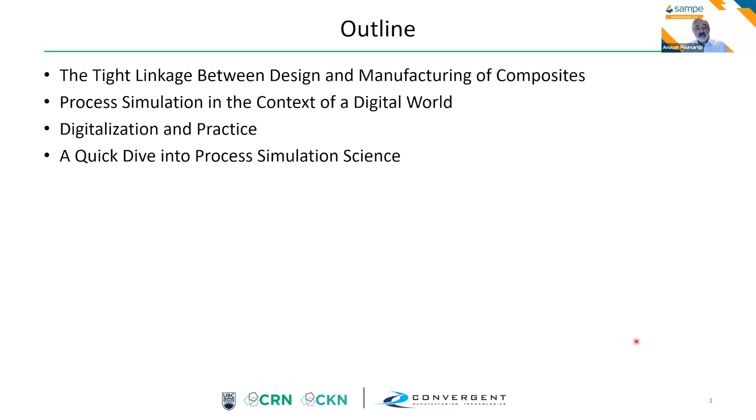So the way I'd like to go is start off by really emphasizing the tight linkage between design and manufacturing of composites, position process simulation in the context of a digital world, talk about digitalization and practice, that is, after all, why we are doing all of this. Do a quick dive into process simulation science, talk about how that science is harnessed with technology, give an example of how we're continuing to push the bounds of what we can do, talk about practicing this capability with examples in materials and process design and in production, and then finally a quick summary and conclusions.

So let's remind ourselves as to what is both the strength and perhaps the weakness of composites. Typically, when you design, you have a function in mind, and very simply you ask yourself: what's the best material in the best shape that allows us to achieve that? And then you have to ask yourself, well, can I actually turn that material into that shape? That is where process comes in.

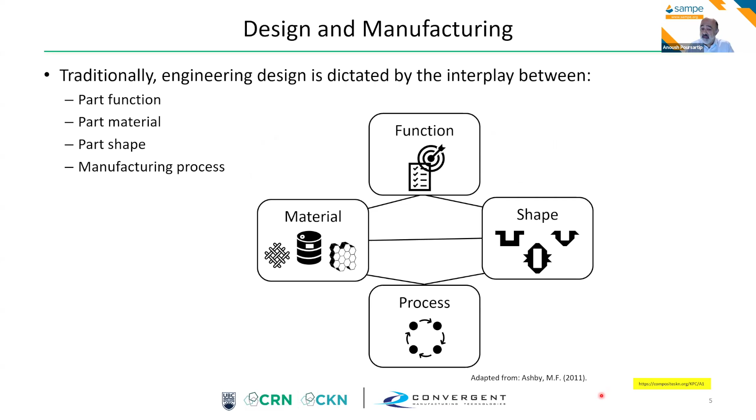The top triangle is very design-centric, the bottom triangle manufacturing-centric. And in the case of composites, of course, the process during the manufacturing steps converts the thermoset from a liquid to a solid; the thermoplastic, you melt it and resolidify it, crystalline or semi-crystalline. That gives you a microstructure, and you end up with the properties that you wish for your design.

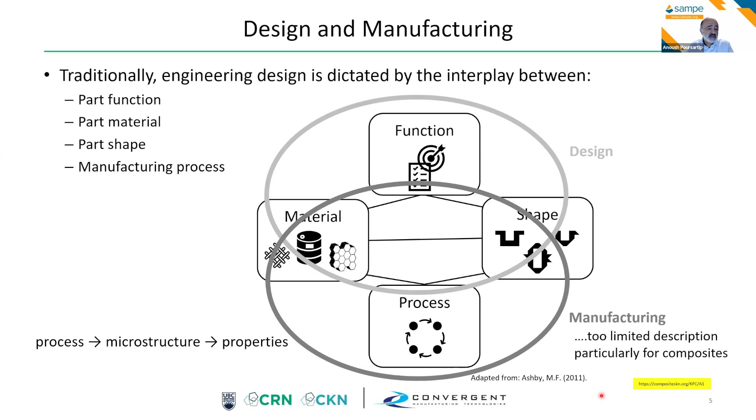Key point to make, of course, is that that definition of process there is a little too limited. As this talk is about processing and manufacturing, let's home in on that for a moment. Let's push function out of the way just a little bit, and actually think about what the impact of this integrated processing of material and shape means.

If you look at certification requirements, they will talk about materials and processes must be defined and stable. You must demonstrate repeatable parts. What does that mean? Whatever you assumed in design, a volume fraction, a degree of cure, a ply thickness, you have to maintain those as you go from development into production. So function, from a manufacturing perspective, is actually replaced by the concept of quality.

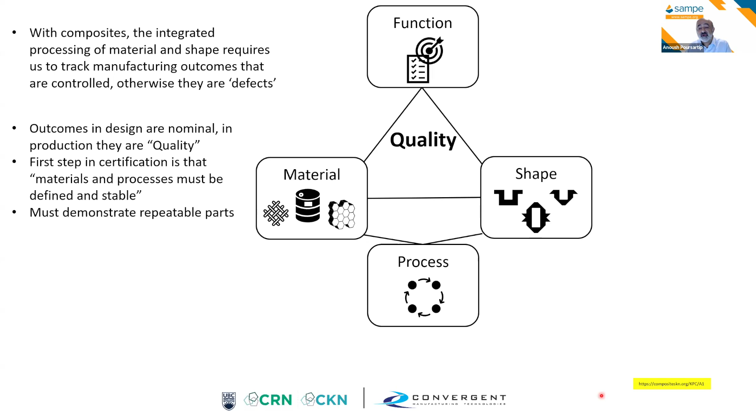So then what we can ask ourselves is, fair enough, what about defining the production a little bit more? This is where we need to bring in the fact that you generate the material into that shape on tooling using equipment. And so now you get this more complete definition of manufacturing.

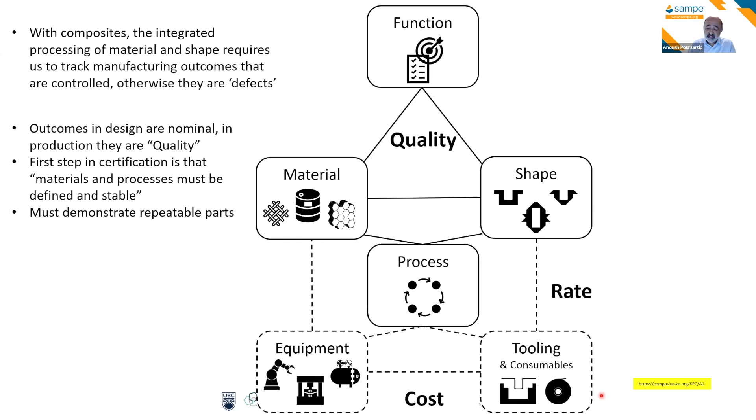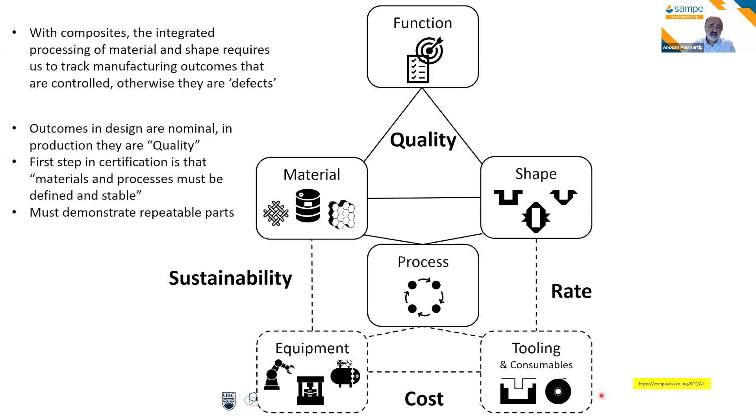Then what we can do is say, well, what are the issues with quality? The answer is, I'd like to maintain quality at a certain rate, at a certain cost, and increasingly with considerations of sustainability. So quality is the one thing we're trying to control in manufacturing, in processing. And it turns out that actually defining what quality is, is difficult.

So we have these outcomes. If they're within spec, 2% porosity, that outcome is not a defect. If it's 3%, it's a defect. So what we can do is we can think about these generic outcomes and when they violate some specification.

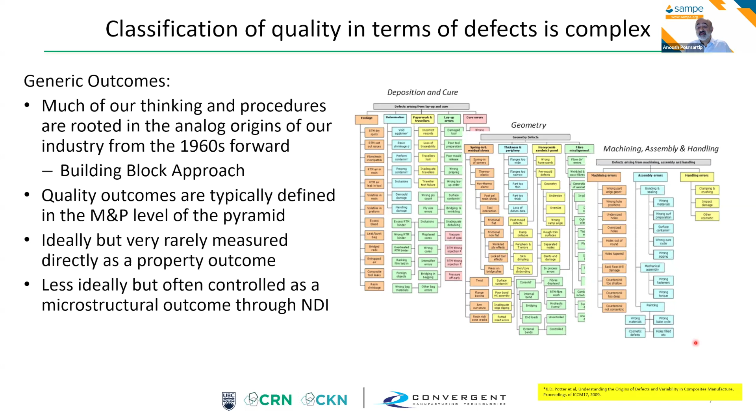Really, what we care about is the property outcome, but it's very difficult to do that. So very often, we control it as a microstructural outcome through NDI. We look at porosity, we look hopefully at thickness, whatever we can measure easily. Very often we're actually forced to use a proxy such as the process history. So managing the temperature history is the way we go. We've cured enough, but we haven't degraded either because it didn't get too hot.

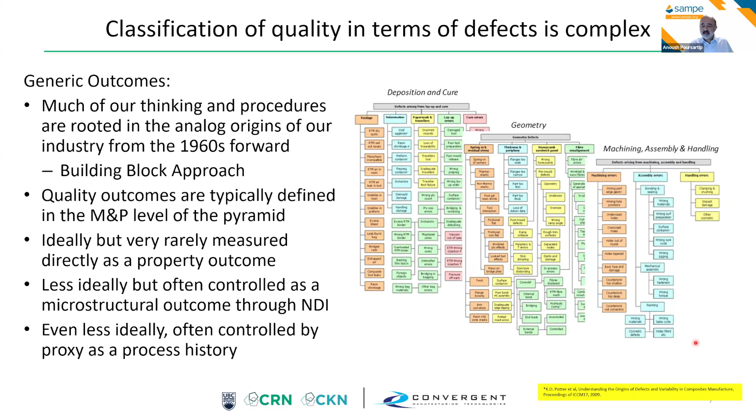So process simulation is very much one way that we're trying to manage all this complexity. So let's position process simulation in the context of all the digital keywords that we hear around us nowadays.

I don't know how familiar you are with the Gartner hype cycle, but I really quite like it. In the Gartner hype cycle, what they do is they plot expectations versus time, and they talk about how all technologies go through this cycle.

If we look at AI simulation for manufacturers, which is a buzzword that is floating out there, they would say that right now is what they call the innovation trigger phase, where what you're seeing is increasing excitement, increasing expectation for that technology. There's generative AI in design and engineering, industrial data management, digital product passports. Then they say there comes a point where you hit a peak of inflated expectations.

They're saying that in 2024, digital engineering's up there. And then everybody becomes disillusioned because the value wasn't there. So you then come rushing down the other side of the mountain into the trough of disillusionment. And they say that's where digital twins are right now, model-based systems engineering, digital twins for products.

And then if you think about where you go next, I apologize, something went wrong there. Then you enter the slope of enlightenment and the plateau of productivity. Back over here, we have funding agency and academic excitement. Over here, you have sustainable industrial and societal value.

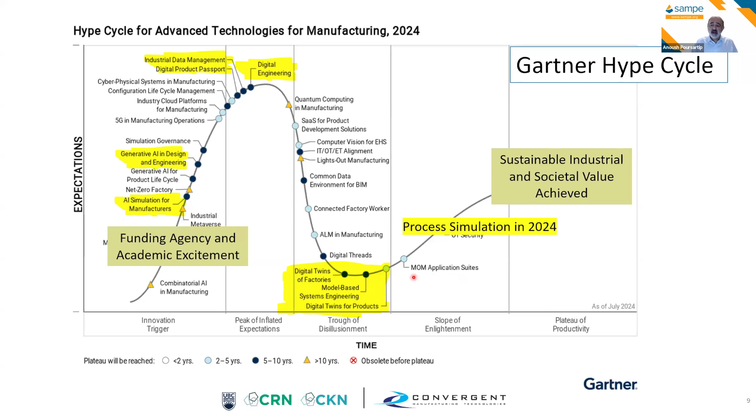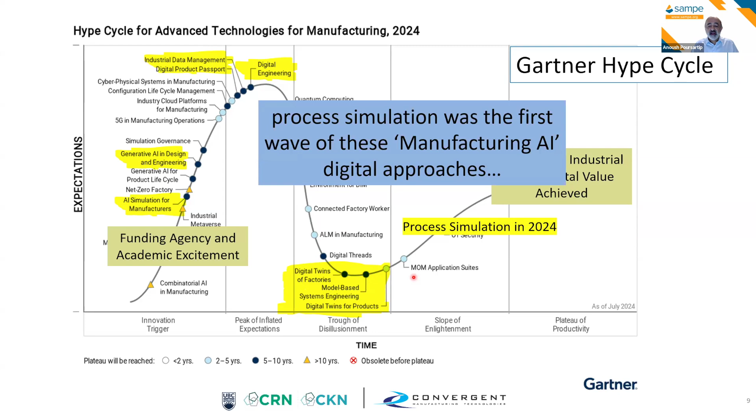So we've gone through these cycles, and I'm going to give you examples of that as I walk my way through this talk. The key point is that process simulation was the first wave of all these manufacturing AI digital approaches. I'm going to argue, and hope to convince you, that it actually forms the framework, the digital nerve center, for all these technologies that are coming along.

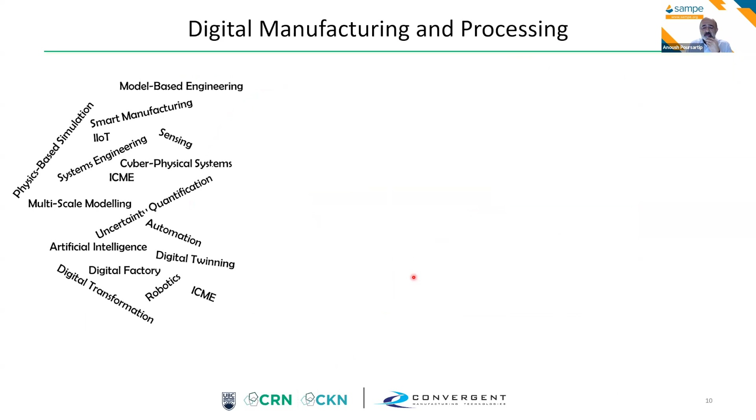So let's think about that a little bit more. There's all the buzzwords on the left, and we're trying to bring some structure to this. One of the more structured approaches that appeared out of Germany some 10 years ago was this idea of Industry 4.0, which says how we've moved from basically water and steam power to this world of dancing robots of today. This is a very manufacturing, factory equipment-centric view of the world.

Parallel to that, coming out of the United States primarily, has been this concept of integrated computational materials engineering, which has a science-based approach to it. It's more design, materials, processing centric. I firmly believe these really come together. They start bringing together all that digital alphabet soup that we just saw.

If you distill it down, what we basically have is tools to help us make better decisions in design, in production. We have prior data, prior experience, scientific process simulation as a structured way of looking at that. We have new data, and data science techniques including ML, AI, uncertainty quantification and propagation. And as we go into the factory, we have sensing, we have automation.

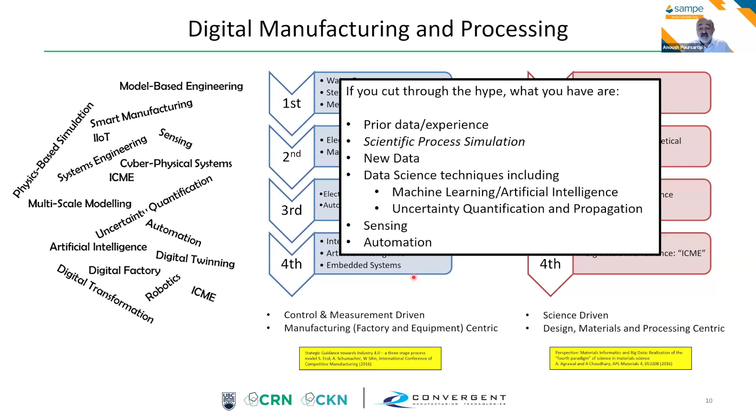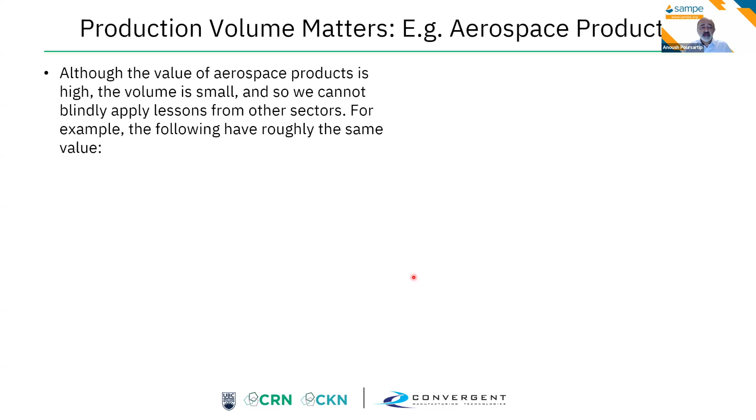Key point as we look at all these digital tools available to us: production volume matters. The value of aerospace products, and I'm choosing that as a market but we could look at any other market, the value is high but the volume is small. So we've got to be careful about blindly applying lessons from other sectors.

These three markets have roughly the same value: 140 million iPhones a year, 8 million Toyota vehicles, about 1,000 Boeing or Airbus aircraft a year. So if you are a machine learning AI expert, you would say, give me 1 million data points, I'll give you a brilliant ML model. Apple would say, that's 2 days production. Toyota would say, that's a few weeks production. Boeing and Airbus would say, that's 1,000 years of production. So clearly, what we need to do is different from those other sectors.

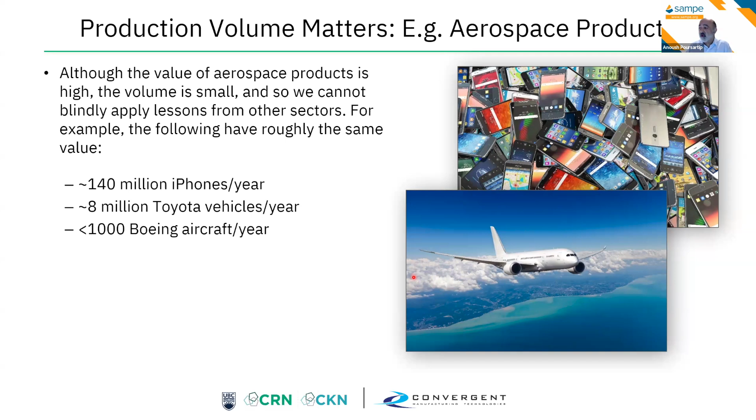So let's think a little bit about the future of digitalization, because clearly we need to understand what tools we have available if we want to make all of this work to our favor.

Up to the early 2000s, digital was the domain of engineers and scientists. We had the biggest computers, we did the most computation. And then something changed. All of a sudden, it was consumer applications that drove the hardware and software revolutions of the last 20, 30 years.

Today, AI, particularly generative AI, is the talk of the town. You can't actually escape it at the moment. But how do we look at AI in the context of science and engineering.

There's no doubt, machine learning is a brilliant tool for basic tasks such as image recognition. If they can recognize penguins on ice floes, of course we should use machine learning to do image recognition of fiber fluff on an AFP machine. But otherwise, we should acknowledge that machine learning is basically a reduced order modeling approach. We should definitely use it, but we've got to use it in a scientific simulation framework. And if you actually look at the literature, people are going that way. We just don't have enough data to do it any other way.

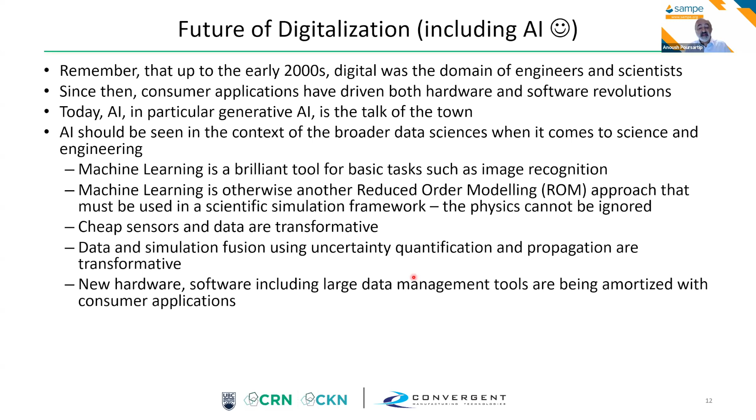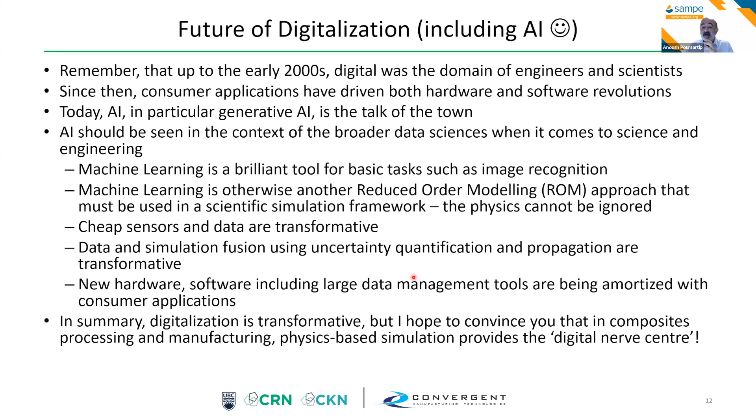Cheap sensors, cheap data associated with those sensors - transformative. The ability to fuse data and simulation using uncertainty quantification and propagation - transformative. All this new hardware, software, the ability to manage huge amounts of data, those are being amortized with consumer applications. We should absolutely use them. But the point I hope to convince you is that all of that needs to come together in a framework where physics-based simulation provides the digital nerve center.

Let's think a little bit about digitalization in practice. Right now, because everything we make has to be safe, whether it's aerospace or outside, we have what you could call a prescriptive regulation framework. We have lots of rules which are there to make sure we have guardrails. So the way to use simulation and digital technologies right now is as a job aid to make decisions faster and better, but you're still doing the old things.

You're doing thermal profiles to prove that a temperature history is within bounds. Everything you're doing is based on the old rules. But the thing to realize is that we really need to look to the future, which is you actually change how we do things based on these new capabilities.

And you go to basically performance-driven design, where you exercise the science to drive manufacturing decisions. And this is being done at a high level. So what you're talking about is replace a temperature history requirement with a degree of cure requirement. But then you have to make sure you don't get other bits and pieces wrong. You need to understand what the consequence of those changes are.

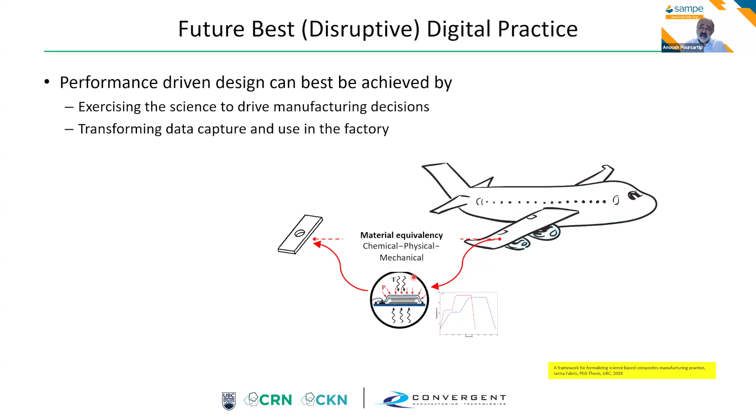And then, of course, that feeds into how you capture data in the factory and how you use it. Noting that right now, we actually don't measure a ton. And when we do, we use it in a cell. We don't know how to use it across the factory.

So let's do a quick dive into process simulation science. If we think very simply of a little cartoon factory, you have material coming in, you check it, you store it. Let's say you lay it up, you might form it. You then go through a transformation step where if it's a thermoset, you cure; if it's a thermoplastic, you crystallize. You'd NDI, machine, assemble, inspect, and ship it off.

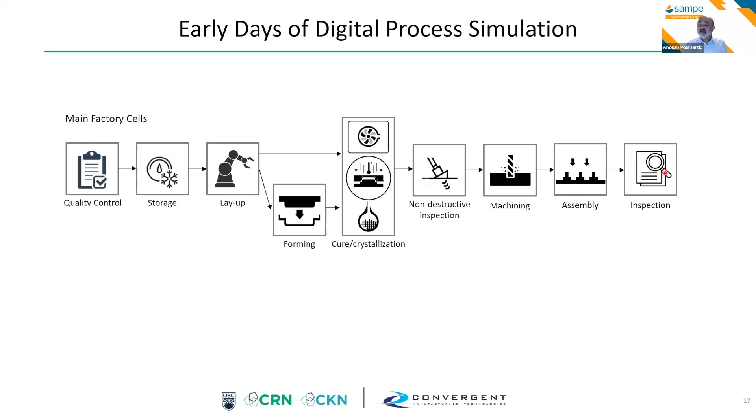The very first model that appeared in the open literature was in 1983 by Loos and Springer. And you can actually look at the history before that, but really people were starting to do simulation in the mid-70s onwards. So very clearly, a technology that was recognized as important at the very dawn of our field.

Loos and Springer really did a brilliant job of not just doing that deep dive into cure, but they also laid out what I believe is the correct way of doing things, which is they talked about a systematic approach where you're tracking the evolution of the material through the whole system using state variables—variables that fully define the system at any instant. And just as a bit of history...

Myself and my colleagues, we've continued down this path. We got in our first master's thesis, Marc Dorosh, in 1988—it was just an implementation of what Loos and Springer had done. And then we've been at it for pretty well 35 years, trying to expand that concept.

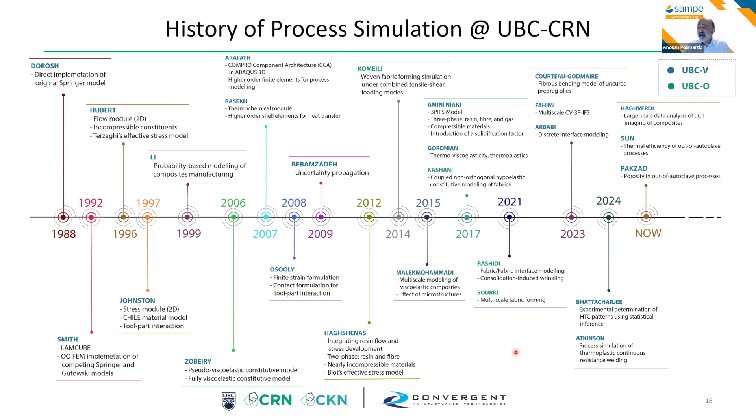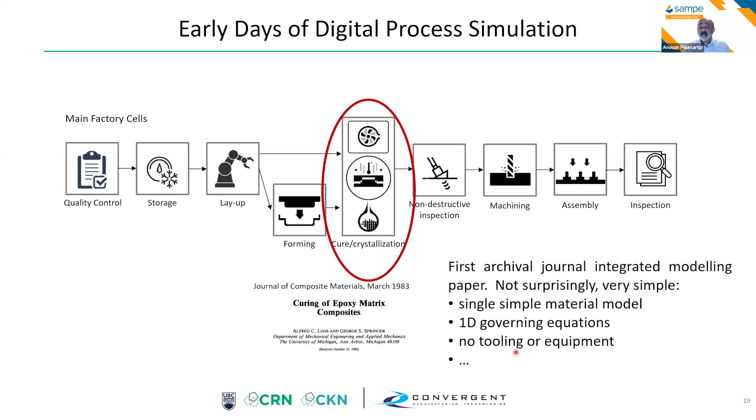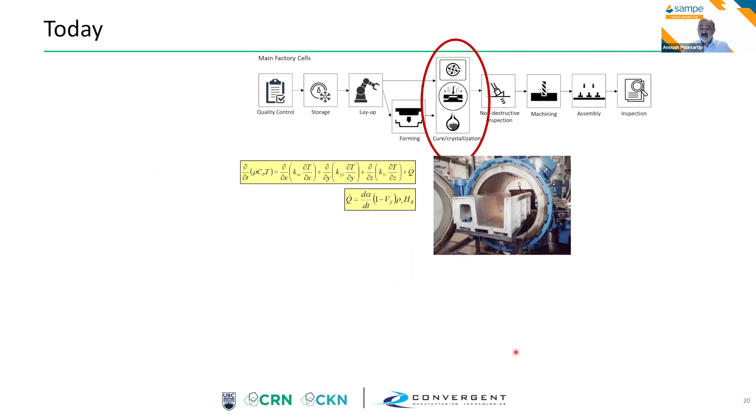If we fast forward to today, that same step is modeled in 3D. What you have is a full representation of the tooling and the equipment, so you're meshing the part, the tool, the boundary conditions. You have sophisticated material models represented in the simulation, and you spend a lot of time ensuring that the boundary conditions for the simulation are correct.

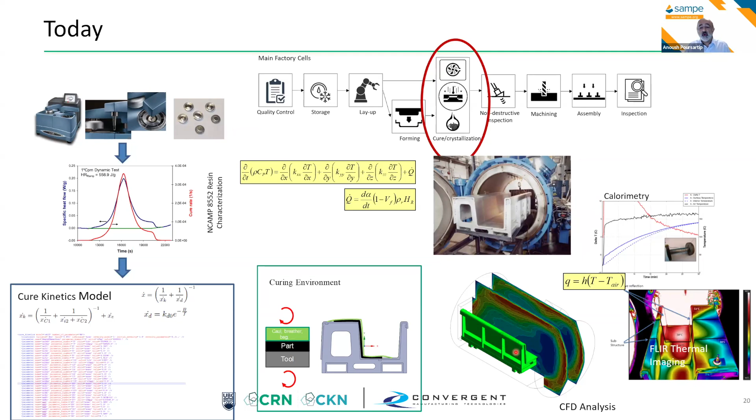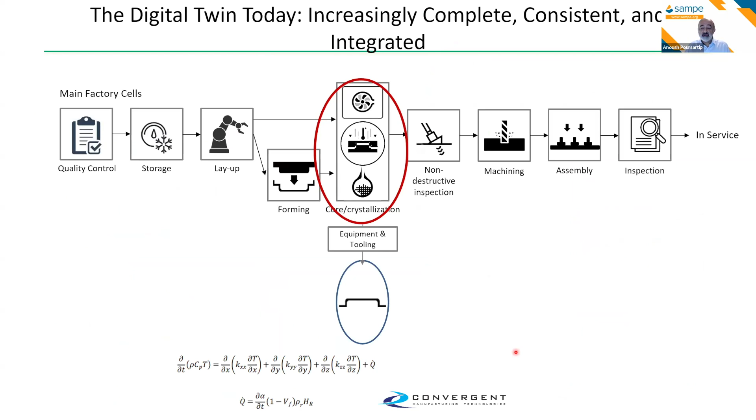So you're taking a piece of the puzzle and going very deep. But at the same time, and I think this is a really important point, we're going wide—we're going across the factory. So you have that cell in the factory modeled very carefully, but our models are now starting to go across the factory.

So what you're doing is you're saying that at every instant I have the digital twin, if you will, where I define all its state variables in terms of chemical, physical, mechanical parameters, and I run it through the whole factory, and I can actually, at the end of this, pass these parameters to performance models. So theoretically, and increasingly so, we can pass residual stress, local fiber orientation, ply thickness, and our failure models can be done on the as-manufactured and not the as-designed.

So I would argue strongly that the future of process simulation is in these holistic, integrated frameworks where the interactions across the whole process chain are captured and propagated through. And I'll talk shortly about how, when you propagate it through, you want to actually quantify and propagate the uncertainty with it. I would say that point solutions don't provide the same value and really shouldn't be done in 2024.

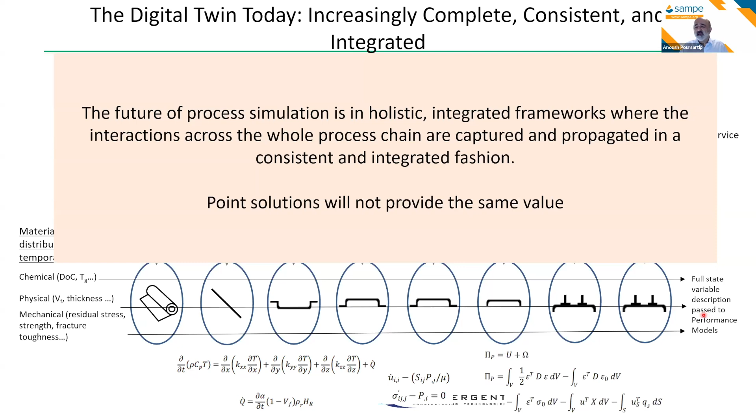Again, I'm going to show you an example on wrinkling. I may be a little bit pessimistic here because this was 2021, and there's actually been quite a bit of advancement in the last few years. But in general, the issue becomes that the science is improving leaps and bounds, and it will.

If I go back here and I talk about thermal management, we have excellent cure kinetics models. We've realized in recent years that there's complexities if you have long holds, which brings in physical aging. So the science for that is being improved, and eventually it's going to end up in the solutions. It's just a matter of time.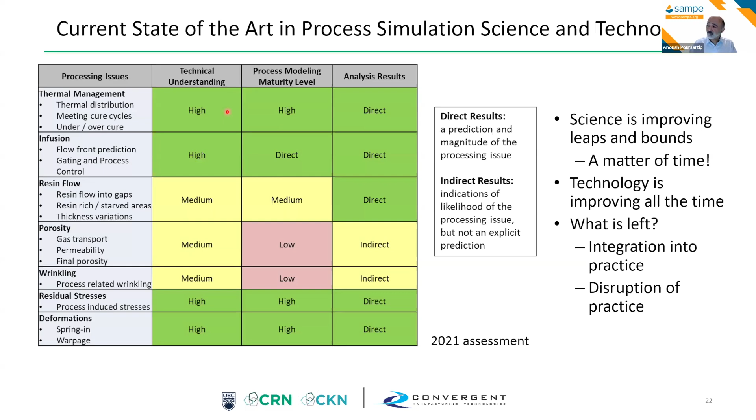So what's left? What's left is getting value out of this. It's integrated into practice, disrupting practice. And then we, of course, get this very, very virtuous cycle of improvement. So let's look at process simulation technology for a moment.

The key is to realize that as you go from science to technology, it's all about usability. So I'm going to give you a couple of applied examples from our own experience base.

We're now at a point where you have libraries of models, and these libraries of models are designed to plug into solvers, be it a standalone solver like the Raven software that I'll show you in a second, or plug into Abaqus or ANSYS, or even open source solvers such as OpenFOAM.

Fundamentally, these libraries are just a bunch of equations. And these equations cover different behaviors: cure kinetics, CTE, cure shrinkage, modulus development. And the Convergent library, for example, has over 140 models in it right now.

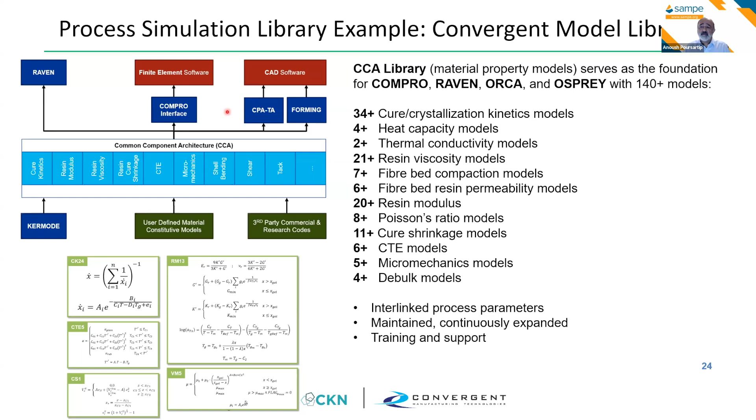Key point to realize, and I'll come back to this in a few minutes, is that it actually doesn't take a lot of effort to write these equations, to put them into any software. The issue becomes, how do you use them? And then how do you calibrate them?

So let's think about use, first of all. What you have to do is realize that these models, even with today's technology, can be quite compute intensive. So you got to ask yourself, what am I trying to do? Am I just trying to understand the material? Well, that's a 0D analysis.

Am I trying to do a quick thermal analysis? Well, then a 1D analysis is good enough for most geometries. Or am I starting to do something more complex where I need 2D or 3D analysis? And your simulation times are going from seconds to hours to days.

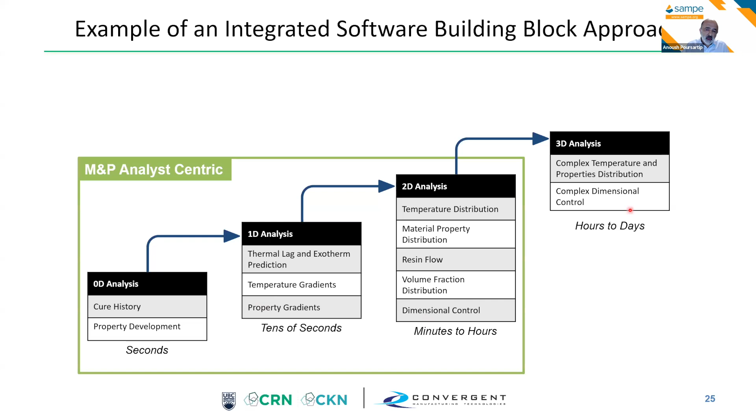If you're going low geometric complexity, you're in the world of the materials and process analyst. If you go up the building block, you're into the world of the product, into the world of the structures. Key point is that you have to have common material models and property libraries so that you understand how you're moving up and down this hierarchy of scale.

You also need to understand what is the value of doing the analyses at different levels, because there's always a sweet spot where you start and then you continue it through the rest of the analysis. There should be no disconnect. And this again goes to my pitch that integration is really, really important to get maximum value.

Let's look at wrinkling. We talked about that as one of the areas where development is ongoing. This is really important to us because we have lots of new processes, be it forming, be it automated fiber placement, where we're dealing with this raw material and we're trying to understand how it will deform. The answer is the material has a huge range of competing mechanisms that are trying to accommodate the boundary conditions. Some of those deformation mechanisms are benign.

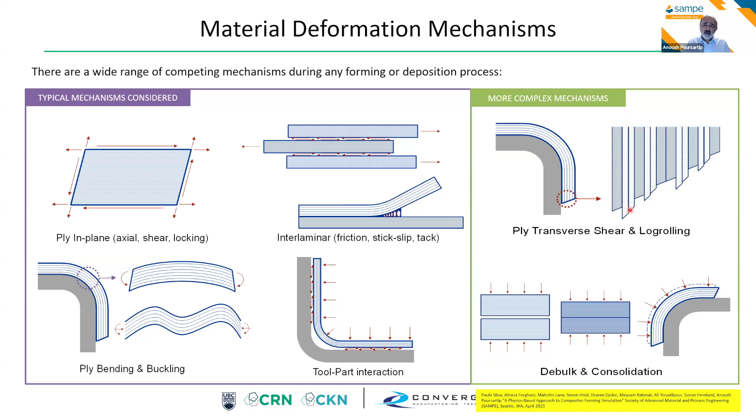For example, shear to a certain extent is a benign mechanism, whereas any axial compressive load on the fibers is a source of concern because it's going to give you buckling, it's going to give you wrinkling. And so this is an area of active development, both in the science and the technology.

So if I were to look at typical solutions available commercially off the shelf right now, using shell models, shell and solid models in an FE analysis framework, the earliest offering out there is probably PAM-FORM. Then we have our colleagues in the Netherlands with a great software called AniForm, and Convergent also has its forming capabilities.

If you look at these, they all have very similar capabilities in terms of what's happening within the solution, and there are materials characterization services to feed the beast. Both Convergent and AniForm, for example, provide that as a service.

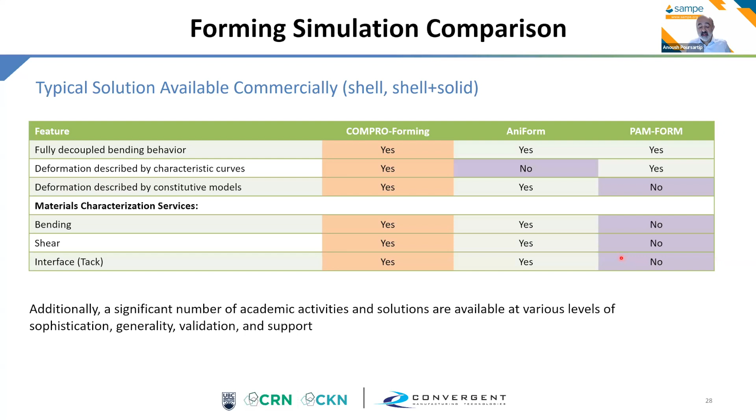On top of that, you have a huge amount of academic activity with varying levels of sophistication, generality, validation, and support. So let me give you an example of the kinds of things being done at the leading edge.

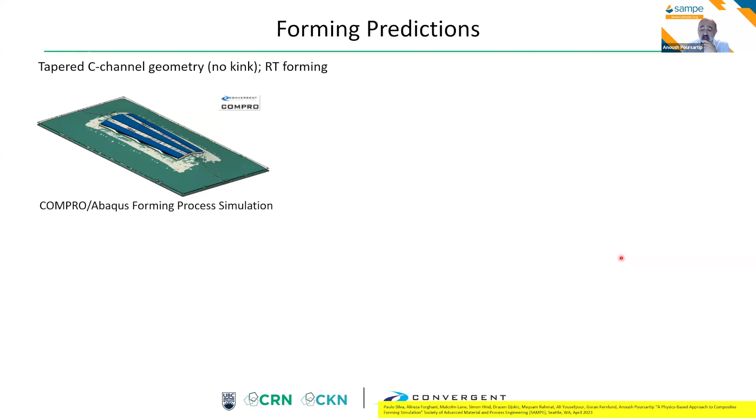Here what we're doing is looking at a tapered C channel. This is a collaborative project done with the National Research Council of Canada. As you're forming this, in this case we're looking at an extreme example where it was formed at room temperature, you start to see wrinkling on the inside of the corner.

The way one looks at that in terms of prediction at the moment is to look at the strain fields and identify zones where the strain field is conducive to wrinkling. You can also look at the edge of the end of the flange, and you see a lot of shearing between the plies, which is actually very desirable. Again, the models pick it up.

If we look at, say, a tapered geometry with a kink, we will typically get wrinkles both inside and outside of that. And again, if you look at your fiber axial strains, the models will show that.

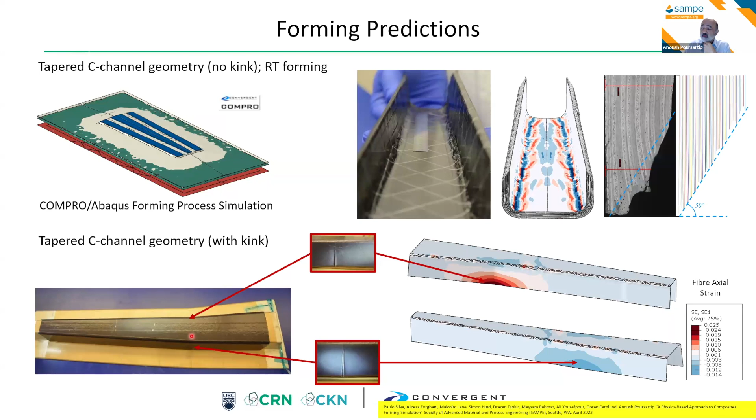To actually predict the wrinkle directly with dimensions, that of course is leading edge stuff at the moment and really quite difficult and expensive to do. But that gives you a feel for how everything is improving around us as we speak.

And of course, there are people trying to do machine learning, reduced order models, surrogate models that actually allow you to do this faster.

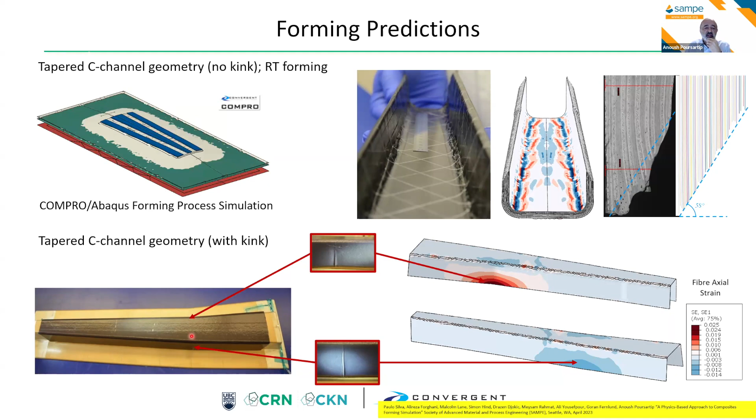Let's move to the practice of process simulation. The first thing I want to emphasize is that good inputs are critical, even more than if you're doing a structural analysis. The most basic processing material card for a thermoset is the Cure Kinetics model, which predicts how the material evolves from a low molecular weight liquid.

As it cross-links, it becomes a gel. Then as the network structure evolves, it actually vitrifies.

So the way we create these material cards is we do lots of tests using a wide range of analytical equipment. Right now, of course, we're focusing on differential scanning calorimetry, using heat flow to quantify degree of cure. You choose your favorite material model equation, and you fit the data to it. That gives you the material card for that material, and off you go to the races to do the simulation.

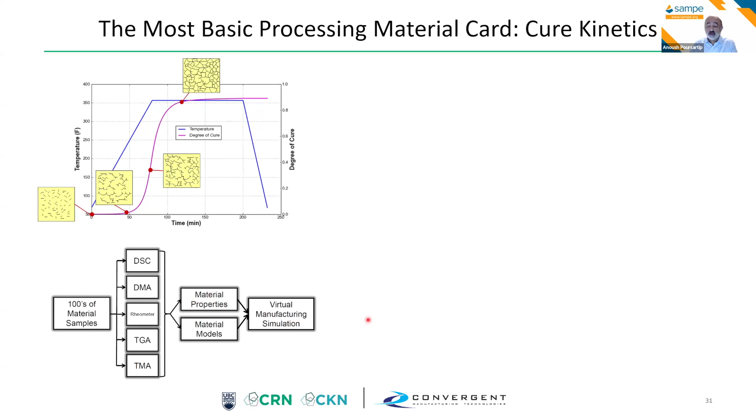Key point to make, and this is old, this goes back to 2008 - Donna Dykeman did a nice job going through the literature, finding every 8552 Cure Kinetics model that existed at the time and just comparing them.

What you see is that sure enough, they all predict that the material cures, but you can see a wide range of predictions, including one which is way off. So pedigree, quality really is important.

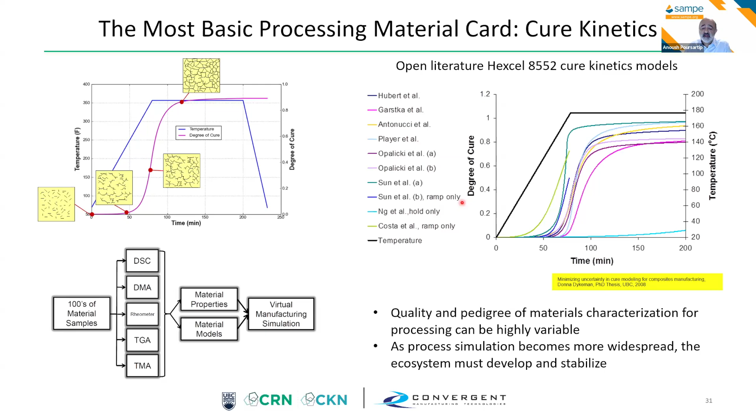The good news is that we're starting to see more and more libraries becoming available, and this is absolutely necessary for the ecosystem to develop, to stabilize.

So here you can see a couple of tables. The one on the right is an open database. A lot of these materials were, in the early days, supported by funding from the US government. Increasingly, material suppliers are funding these because they're starting to see big value in providing them to their customers. The table on the left is a more restricted list available to contractors for the US government. There's, of course, lots of material model libraries held in a proprietary fashion by companies that have adopted process simulation early.

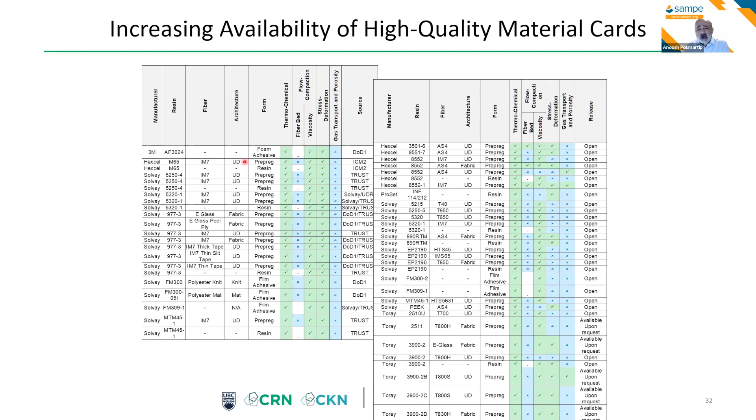So uncertainty in your material inputs is critical. Another one, which I think is really important, is uncertainty in your heat transfer coefficients in thermal process simulation, which is otherwise a very stable technology.

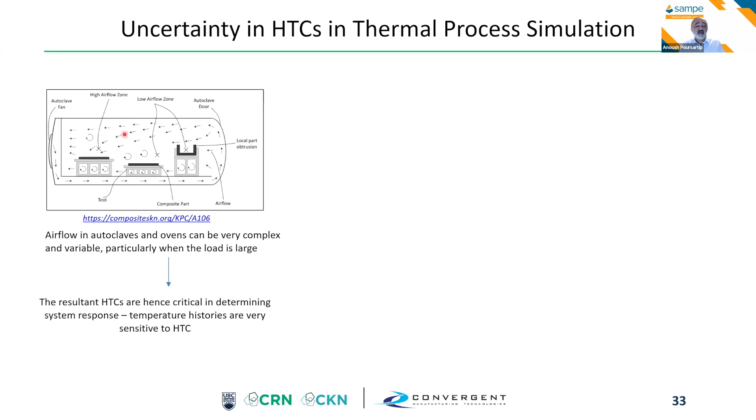Here, what's happening is you get very complex airflow in an oven or an autoclave. If the load is large, or you have a mixed load, you really need to understand what your HTCs are, because with airflow, the heat transfer coefficient actually plays a big role in thermal lags and actually thermal leads.

So a lot of work has gone into trying to measure that. And again, here you could get yourself into a world where the best approaches are uncertainty quantification, Bayesian inference, sophisticated mixed mode data collection, and data analysis methods.

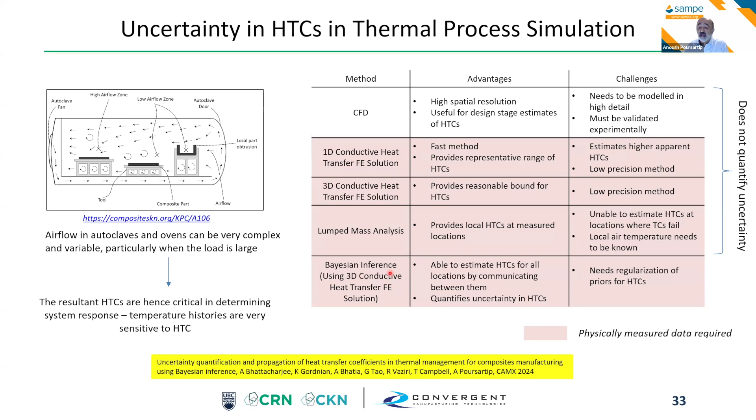So let's move on to actually some materials and process design examples. Let's go back to the beginnings. Let's talk about cure cycle optimization, finding a cure cycle that'll give you a decent degree of cure.

So this was done around the early 2000s, and since then we've used this as a case study. Now you can do that same analysis using very quick software, using theory-guided machine learning as a surrogate model to explore the space quickly. You can do this analysis now as a non-expert in about a minute.

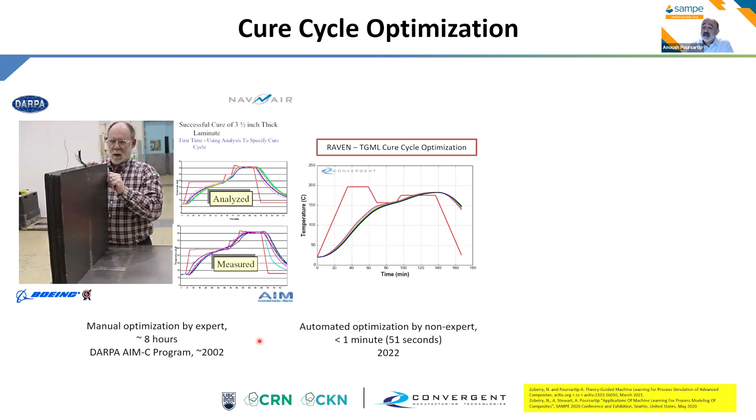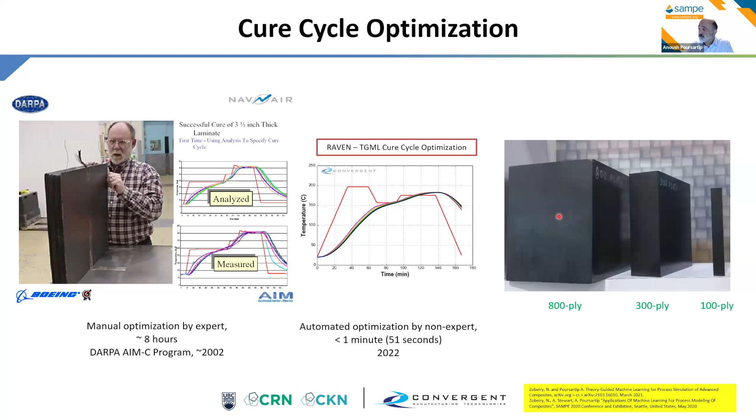If these seem small to you, here's another well-known example. Remember that DARPA program was in the early 2000s — just a few years later, the Boeing 787 program launches, and that Boeing team, led by Dr. Nelson, comes up with cure cycles for these huge barrels. It's called cycle 297 because that was the 297th iteration of the simulation.

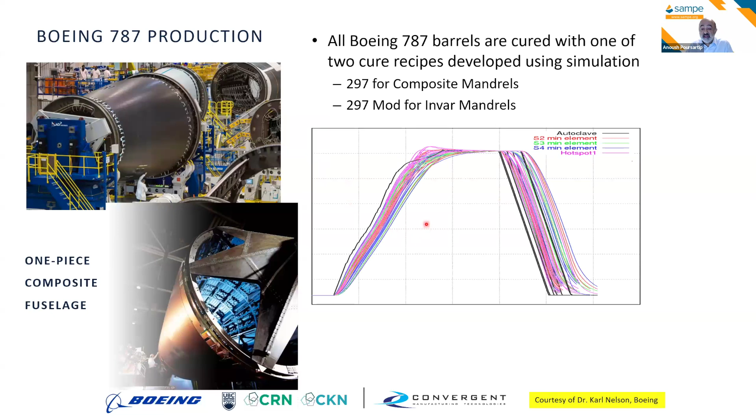And this is the prediction. Note there's no axes on this because that would leak proprietary information. This is the actual results of a pre-production run to validate the simulation. If you overlay that, you can see the simulation did an excellent job. This was done, as I said, in the very early 2000s.

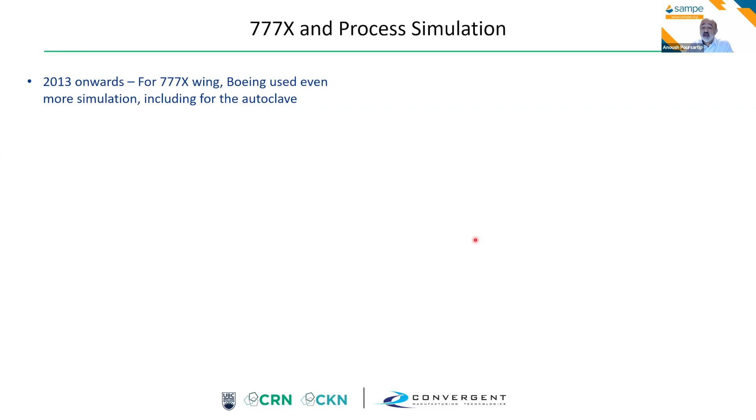Boeing actually extended that when the 777X program was launched. They went a step further and said, can we use simulation not just for the part, but for the autoclave? By coupling computational fluid dynamics with that kind of thermochemical simulation, they were able to design a very sophisticated longitudinal flow autoclave, which was then patented.

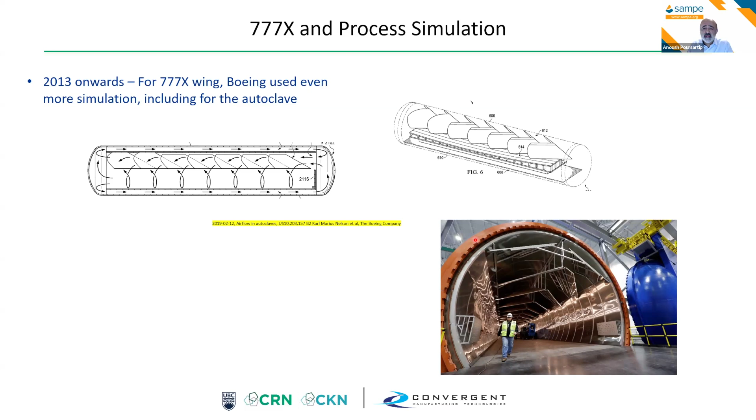Now, the key point I want to make is that thermal simulation is not just for big companies — it's not even for aerospace. Here's an example of a small high-performance carbon fiber component company who make very high-performance carbon fiber cranks, and how they use simulation to help them.

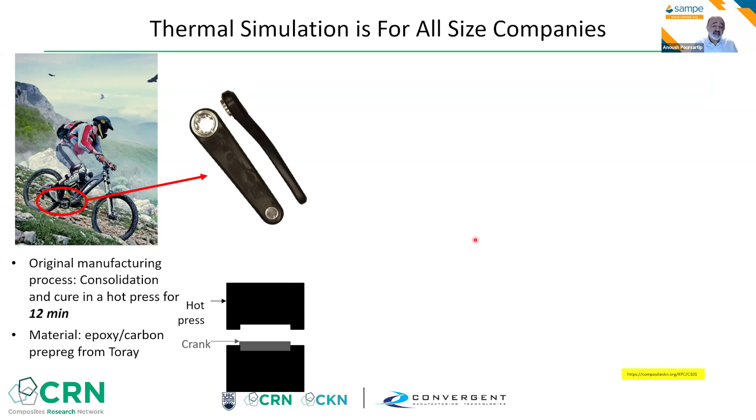The way they make these cranks is they consolidate and cure them in a hot press. It's a carbon epoxy prepreg from Toray, and their standard cycle was 12 minutes. They wanted to double production. The press was their bottleneck, since the crank spent 12 minutes there — that was their most expensive piece of equipment in the factory. They could not afford to put in a new press facility.

So they came to UBC, and we asked, can we use process simulation to help them? We made a very simple cure kinetics model, a tiny fraction of the effort that would have gone into, say, that airplane, the 787. Based on that, we identified that the material was gelled and, in fact, vitrified within 6 minutes. So this was an obvious candidate for a cure plus post-cure approach.

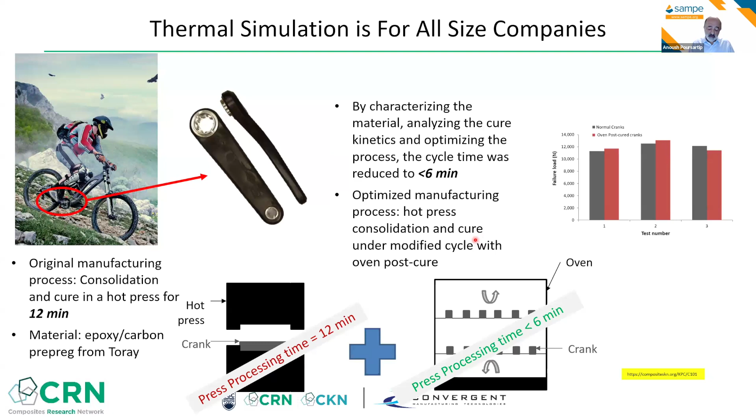All of a sudden, the process time was brought down to 6 minutes. They did a number of tests to prove the performance was identical, and were able to double production at a proportionate cost that was absolutely within their capabilities. If we move past thermal analysis, ask what else is very mature — process-induced deformation, tool compensation, understanding how your geometry changes — that really is quite doable now.

There's always exceptions, but on average, what we're looking at here is the 777 aft strut trailing edge fairing. You take a CAD model, export it, mesh it, then run a thermal simulation to make sure the thermal history is correct, and then run a PID simulation, and you can see that it does a great job of predicting the spring-in of this structure.

This is actually a case study that was done way back, I believe in the 1990s, using 2D models. It's a lovely example showing how the science improves, but the technology also improves so that you can practice faster and faster.

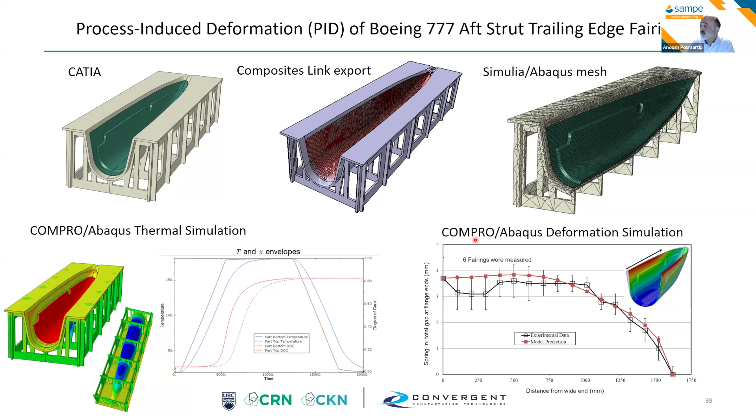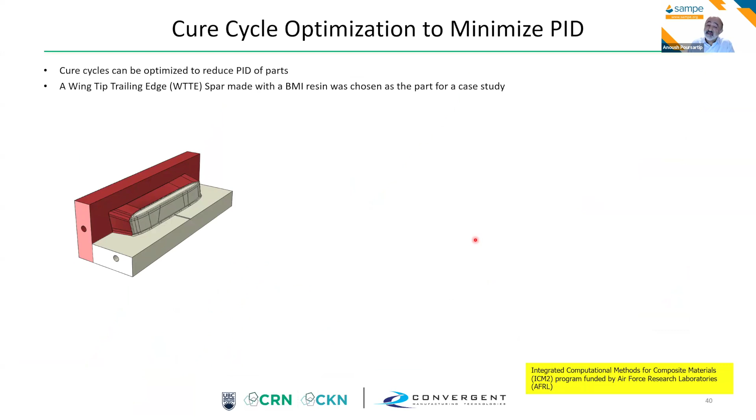Another one, done more recently, was to actually use the cycle to reduce the process-induced deformation. Here we're looking at a wingtip trailing edge spar. In this case, it was a BMI resin, so a high temperature resin. And what you have is a very complex manufacturing process in terms of the mold, so you get into lots of technical details.

How much of that detail should you remove? But again, these are now things that are increasingly well understood. You then get your prediction, and what was done, the baseline cycle was modified to get the lowest possible deformation. In fact, the simulation led to a 35% reduction in the process-induced deformation.

One thing that I believe is really important and gets me very excited as an academic, as a researcher, is the ability to propagate uncertainty in simulation. I think this is really important because as engineers, if you talk to practicing engineers, they don't expect perfection. They're quite comfortable with the idea of managing uncertainty as long as you can quantify it. So what I'm going to show you is how you can propagate thermal cure model uncertainty through a process simulation so that you can actually predict what's going to happen at the end.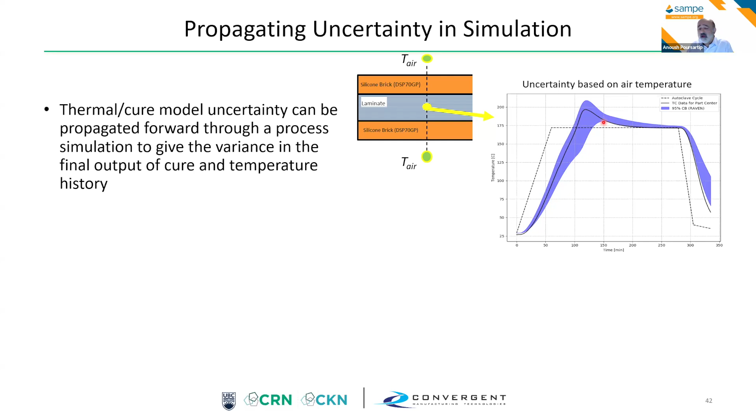So then you ask yourself, where do I go from here? And the answer is, I can now get into data assimilation. What I can do is say, but what if I have other information, not a thermocouple in the laminate, because I'm trying to avoid that. But what if I put a thermocouple on the silicone bladder? You can think of this as a thermocouple on the tool.

Can I now improve my prediction based on this new information? And the answer is yes. If you actually now update your prediction because you have more knowledge, you can actually really tightly bound the prediction.

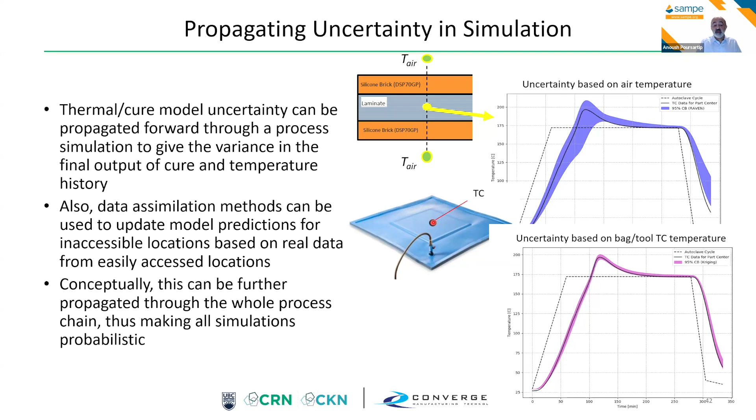And these are the kinds of things that Argonel will show at CAMX in a couple of weeks. We're going down the path of trying to really formalize this. And conceptually, of course, this can be propagated through the whole process chain, thus making all simulations probabilistic.

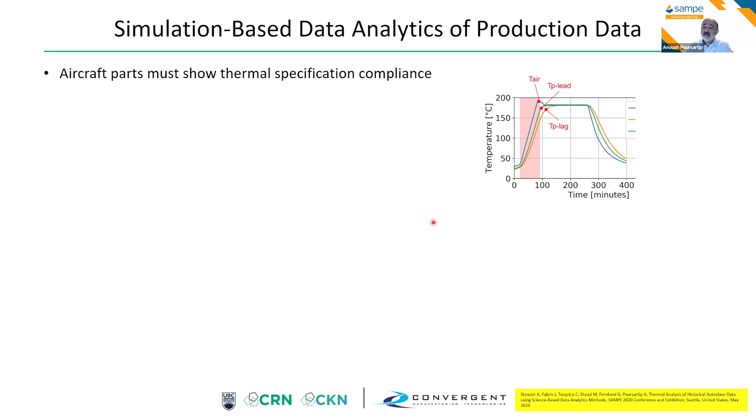This has been pushed increasingly into production. Remember, every aircraft part must show thermal compliance, so you've got to show it's within a range of temperature increase, temperature hold, and so forth. The problem is that very often, especially when you're making lots of little parts, the airflow interferes with all the parts in there. So you end up getting very complex airflows depending on what you have in the autoclave that day. To date, this is typically dealt with by having experienced personnel who use their accumulated know-how.

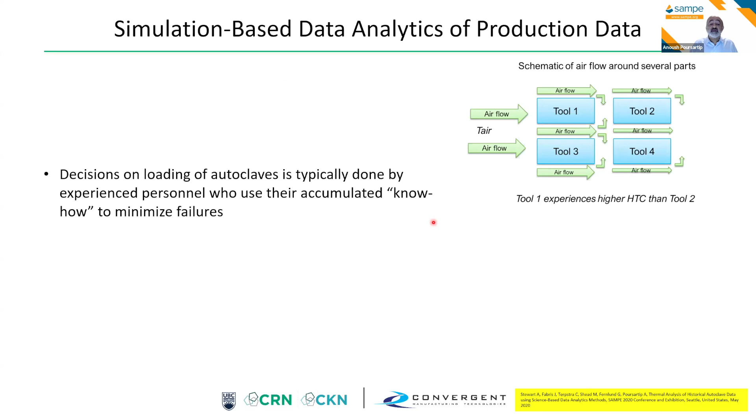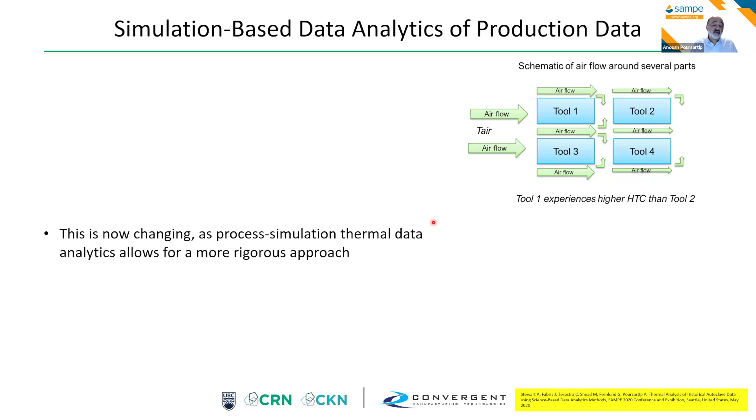Clearly, we want to go past that. For one thing, those experienced people are retiring. Clearly, we have better scientific-based tools. And so a while ago, nine years of production data was analyzed from one autoclave. This was a collaborative activity between Boeing Winnipeg and Convergent.

4,000 runs, 75,000 parts, 200,000 thermocouple traces were analyzed. Out came a wide range of HTCs and all sorts of insights. Not surprisingly, thermally massive tools take longer to get to dwell than thermally light tools.

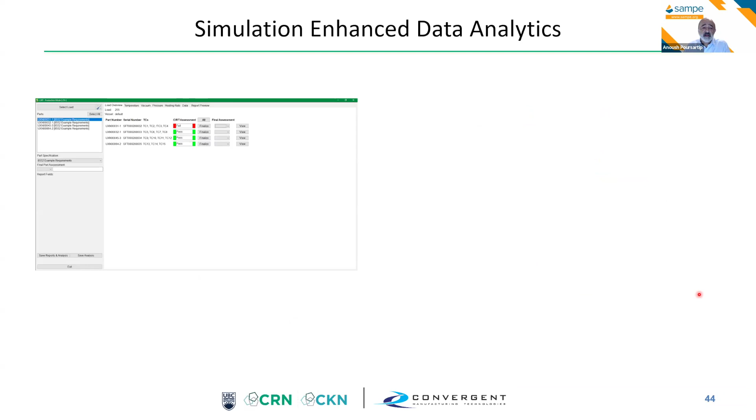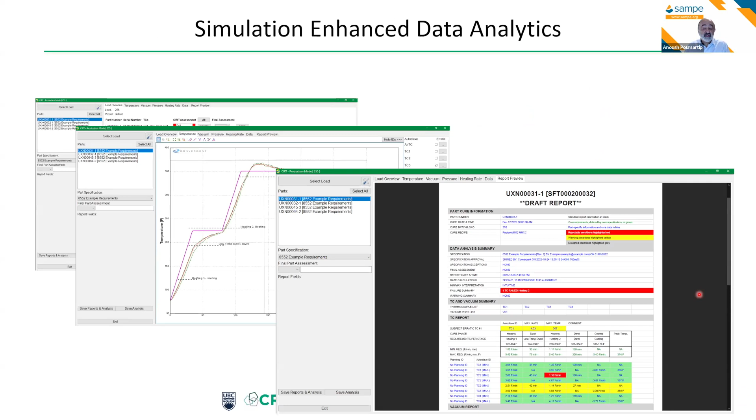All of this has been used to create a new generation of cure inspection reporting tools, where at one end you're basically doing what you were already doing using an Excel spreadsheet, but more methodically. You're getting the same data, creating the same reports, but now if there's a discrepancy, you can use simulation tools to look into it. From my perspective as a researcher, even more excitingly, you now have data that can go into manufacturing analytics. You can analyze it and use that to do what you might call smart loads.

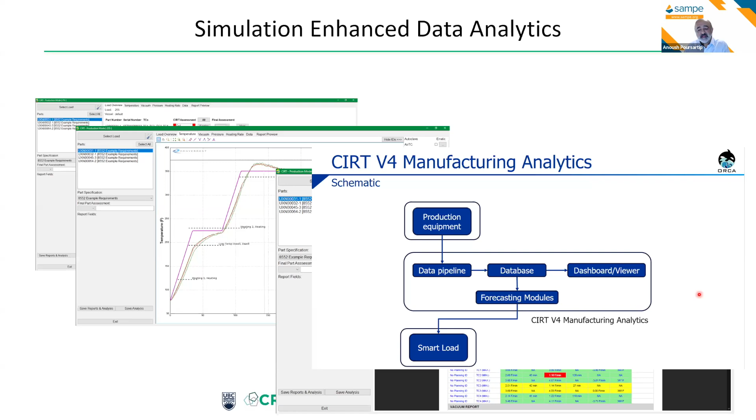Finally, let's do a quick example of how we could push things even beyond this. What I'm showing you is really well-established stuff that is starting to be introduced. Let me finish off with a forward-looking example of simulation in production.

If you talk to automation people, and I'm very grateful to Dr. Homayoun Najjaran for this, automation at its simplest level is sense, think, act. You sense something, you analyze it, you act on the basis of that. The problem we have in composites manufacturing, say in automated fiber placement, is: what should we sense? What do we do with it? How do we run our automated fiber placement better?

In a project funded by the US Air Force by Dr. John Russell, when he was still at the Air Force, we worked with our colleagues in electrical engineering and developed these smart rollers. It's a plug and play roller that measures pressure at the moment. Shortly, it's going to measure shear, and it will also measure temperature as a bonus. John Madden's group are designing the fingers for the Honda robot, so this is very much their expertise.

These capacitive smart pressure sensors measure the local pressure as the roller moves over a part. The question becomes, well, what do I do with this? Because if I just measure pressure, that's not enough.

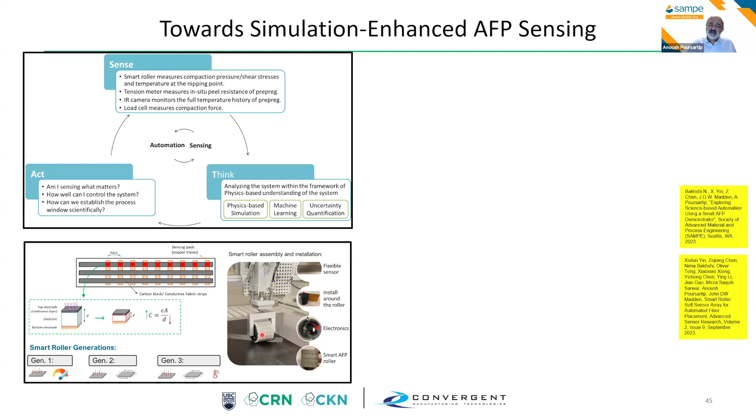Well, what we've started doing is combining this with physics-based tack models developed under a NASA program a few years ago. What you can now do is understand how pressure, temperature, and velocity give you tack. And then you can start looking at what happens when you start steering and that pressure and shear interact. We know there are patents out there that say, for example, if you want to go around the curve, apply shear, because what gives us wrinkling and other defects is actually the bending.

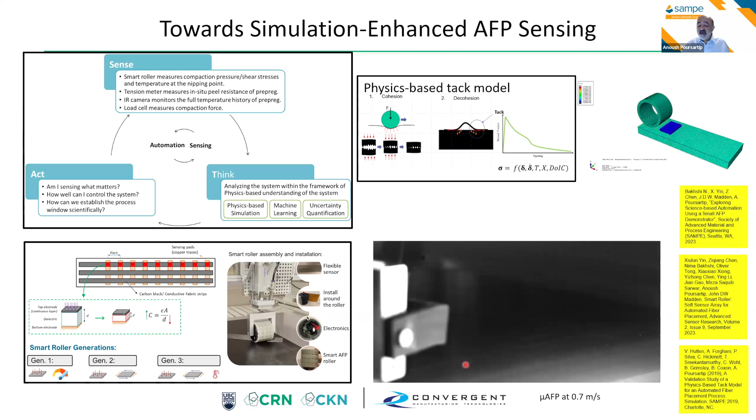What you're seeing here is a little micro AFP machine running at 0.7 meters per second with high-speed DIC showing the development of the wrinkles in real time. So you can see a world where we're sensing, we're making things, and we're using process simulation to understand what is going on.

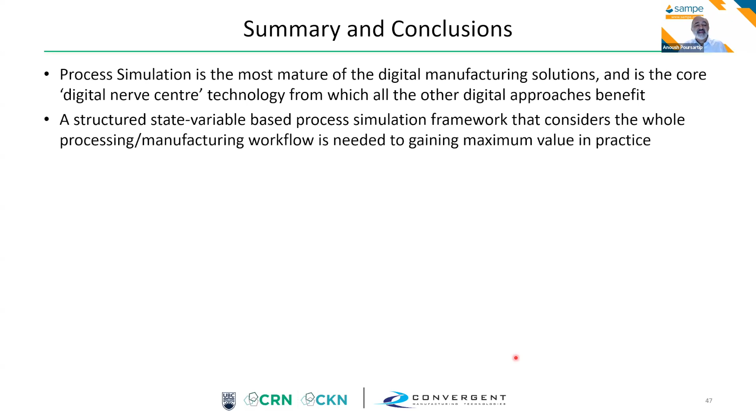So let me bring this to a conclusion. Process simulation is the most mature of all the digital manufacturing solutions, and hopefully I've convinced you that it's what allows us to bring together all these things that happen during the manufacturing of a composite part. It really is the foundation for making use of all the other digital capabilities that are now ever more available. A structured approach using state variables that considers the whole workflow will give us maximum value in practice.

A huge amount of science is being developed, and there's a pipeline to use it. It would be great if that science is developed and shared in a manner that makes it easy to just plug it in, just drop it into the framework. That will make the movement of the TRL levels as fast as possible. In turn, the technology platform needs to be integrated and maintained so it can actually be used to maximum effect.

Finally, I hope I've convinced you that process simulation is not just the code. It's the integrated combination of the science, the technology, and the understanding of the application needs. When you put those together as a whole, that's when you start getting maximum value in practice.

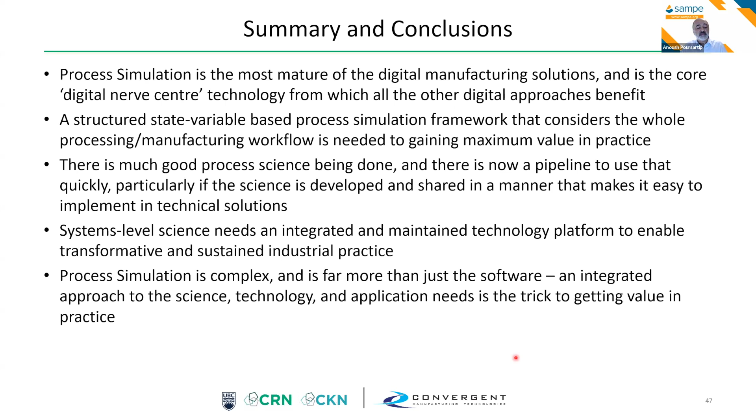With that, I'd like to again end with acknowledging my colleagues, our collaborators, and again acknowledging that anything you've heard is my biased view and is based on many examples from our own work. With that, I'd like to thank you and answer any questions there may be.